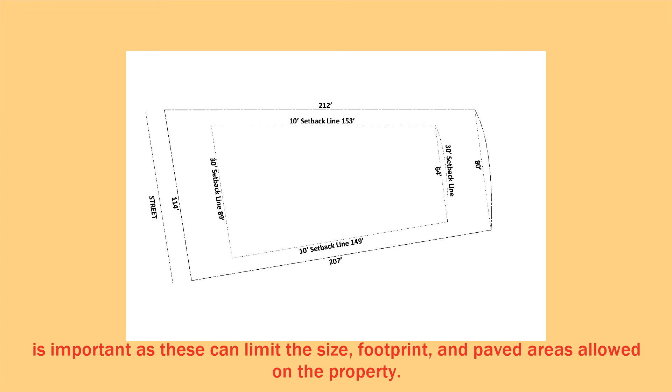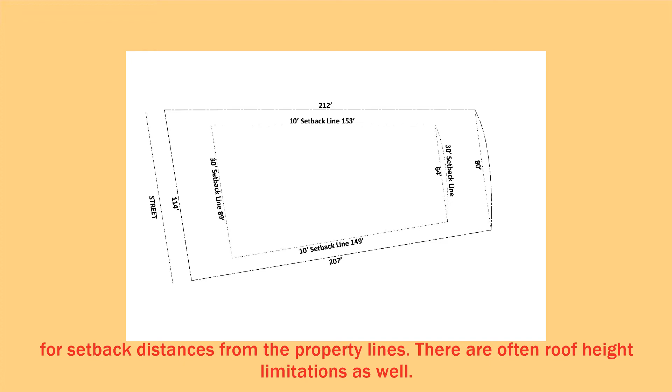Understanding the requirements of the applicable zoning codes is important, as these can limit the size, footprint, and paved areas allowed on the property. It will also establish limitations on where the house can be placed on the property through requirements for setback distances from the property lines. There are often roof height limitations as well.

Additional requirements will vary by district and authority, such as limitations on auxiliary uses of the site, such as a home business, and requirements and limitations for parking different types of vehicles. The physical aspects of the site must also be considered. You should be aware of where the property lines are when you visit the site, how the site slopes and drains, the soils on the site, and whether they're suitable to build what you want.

Rock outcroppings can limit where you build, the groundwater level can impact foundations and basements, and adjacent properties might impact drainage and views onto or from your property. Many soils contain radon, which is a gas you can't see or smell but must be properly controlled for health reasons. Mitigating radon is fairly simple, but you should be aware if the property is affected by it.

Available views can be important in picturesque areas and should be considered. Hills, valleys, mountains, oceans and seas, rivers and streams, lakes and ponds, natural reserve areas, trees and forests, prairie or desert views, sunrises and sunsets are all important opportunities to take advantage of. Be aware of any environmental impacts that can affect the quality of the site.

Weather is an important consideration, especially in terms of the sun path across the property, wind and storm directions during the various seasons, snowfall amounts, and any watercourses and features that might be on or adjacent to the property. Man-made impacts are important as well.

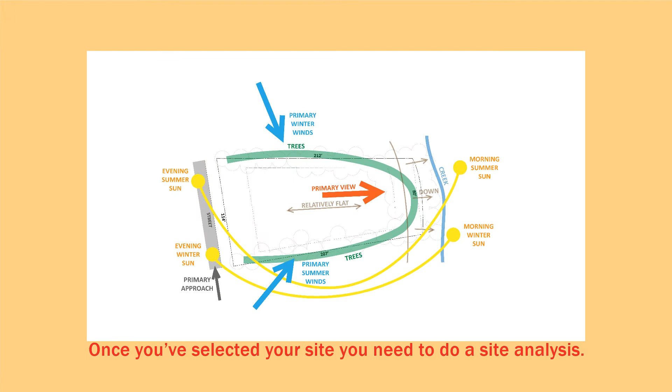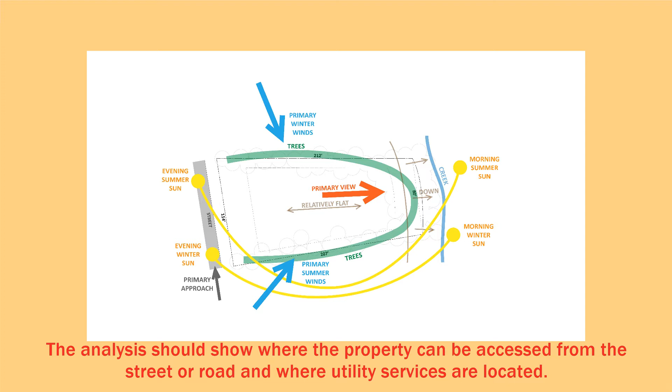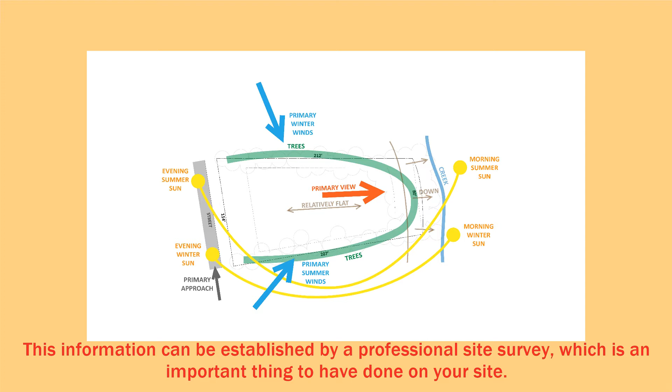Once you've selected your site, you need to do a site analysis. The analysis should show where the property can be accessed from the street or road and where utility services are located. It should show how the property slopes and any features of note such as trees and shrubs, streams, ponds, shorelines, rock outcroppings, and wetlands. This information can be established by a professional site survey, which is an important thing to have done on your site.

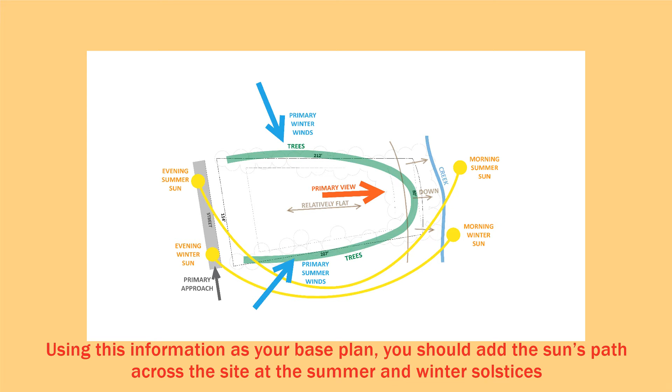Using this information as your base plan, you should add the sun's path across the site at the summer and winter solstices and at the spring and fall equinoxes. Use arrows to show the directions of seasonal winds and where seasonal storms come from. You can typically find this information online through your National Weather Service.

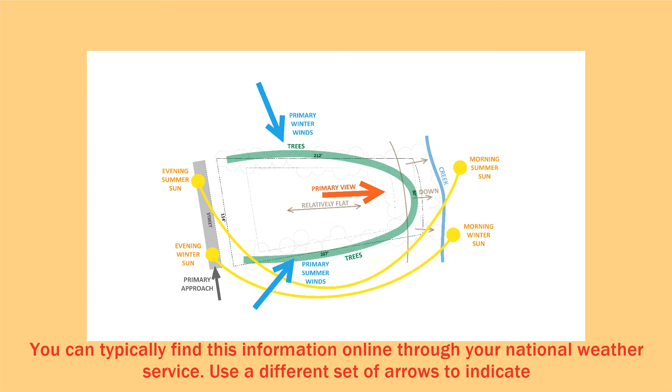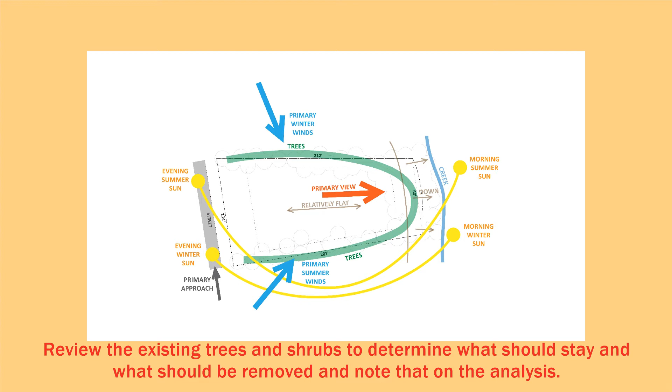Use a different set of arrows to indicate any desirable views. Be sure to show adjacent houses and buildings that will limit those views. Review the existing trees and shrubs to determine what should stay and what should be removed, and note that on the analysis. Outline areas that will limit where you can build, such as poor soil, rock outcroppings, or wetlands.

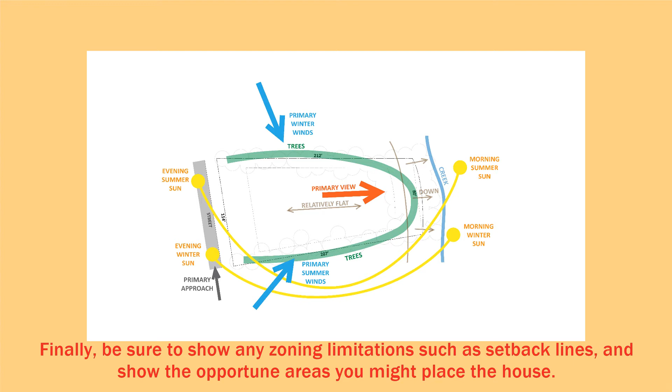Finally, be sure to show any zoning limitations, such as setback lines, and show the opportune areas you might place the house. This site analysis is an important reference for your house and site design, allowing you to take full advantage of any opportunities. When you design your site, be sure to do multiple schemes in conjunction with the development

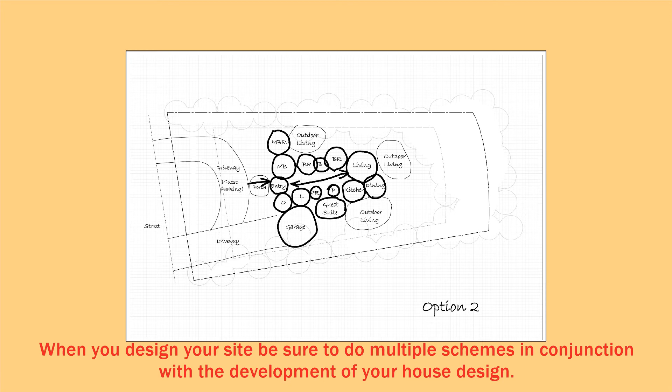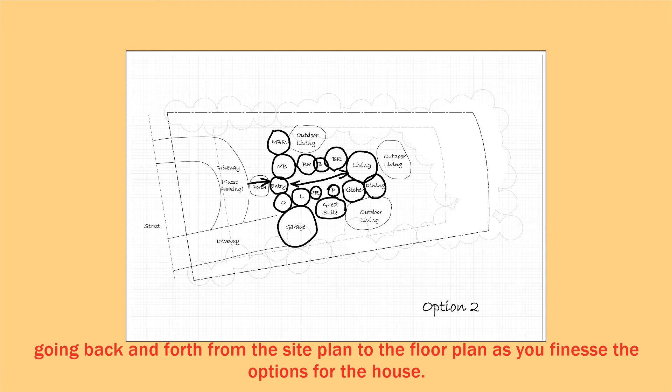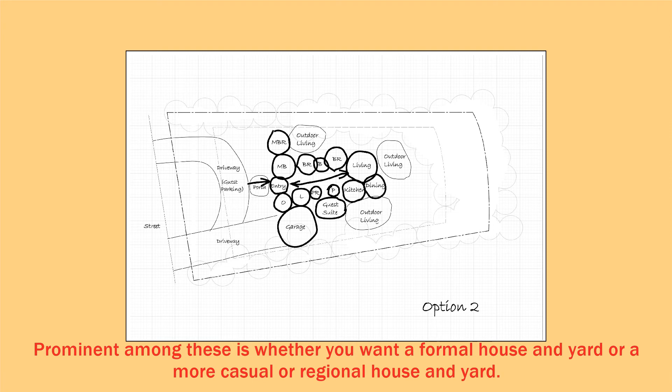of your house design. Do multiple concept plans for each location you're considering to place the house. These will then be further developed over time, going back and forth from the site plan to the floor plan as you finesse the options for the house. When planning the site, you need to consider many things. Prominent among these is whether you want a formal house and yard or a more casual or regional house and yard. This will depend on aesthetic preferences for the house, but will also be influenced by how you and your family want to be perceived by others.

For automobile access, consider the direction of the approach from the street, then how you want to view and approach the house once you're on the driveway of the site. This sequence will establish the perception of the house by visitors and guide you in your house design. Parking for guests and for the family should also be located. If the street has sidewalks on the adjacent properties, be sure to extend them across your lot frontage. Accessing the site by way of a sidewalk should also be considered.

Finding the main entry should be easy to discern. If it is front and prominent, be sure to provide a nice walkway from guest parking and any public sidewalk. If you want the entry more out of sight or through a courtyard or garden, be sure to provide an identifiable means of getting there, using the walkway and possibly an opening in a garden wall or a set of welcoming gates. However, never hide the main entry such that no one can figure out how to get there.

The family entry should also be considered. Will it be a side entry from the family parking, the back of the house, or will it be through the garage? Mail service is something to determine for your site. Most new neighborhoods in the U.S. require a curbside mailbox. However, many established neighborhoods still have doorstep delivery, which will require a mailbox at the entry.

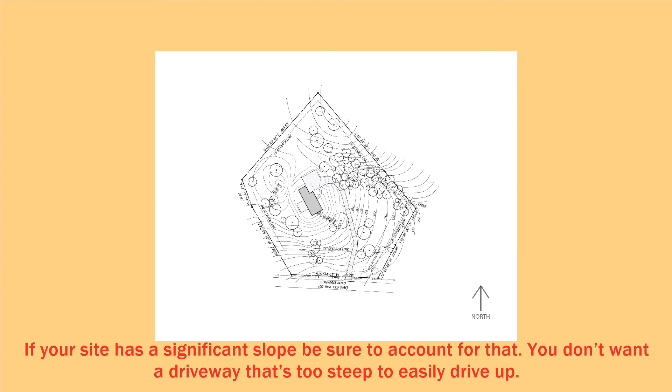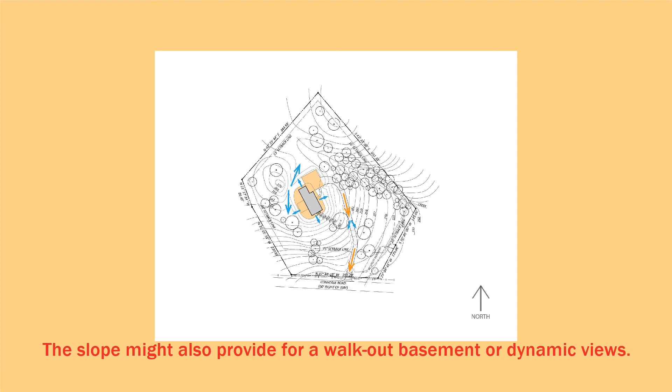If your site has a significant slope, be sure to account for that. You don't want a driveway that's too steep to easily drive up. You also don't want water from uphill flowing into your house or garage, but rather you should divert it around the house. The slope might also provide for a walkout basement or dynamic views.

The rear yard should be considered in terms of planned activities and the areas that they'll need. Porches, patios, decks, swimming pools, and gardens should be addressed in conjunction with the house design, sun paths, and weather impacts. Some areas will have alleys that are used for garbage collection, and some areas have paved alleys with a requirement for all driveways and garages to be at the back of the property. These will impact how you design your yard.

Finally, you'll need to consider landscaping. Where do you want grass, gardens, ponds, fountains, gazebos, ornamental trees, shade trees, or shrubbery? Do you want the landscaping to provide privacy or a sense of formality? Be sure to also consider lighting opportunities.

Use all of the information in this video as a guide to selecting, analyzing, and designing your site. Remember, there are a lot of things to consider. However, understanding and resolving these effectively will allow you to design a wonderful place to live your life.